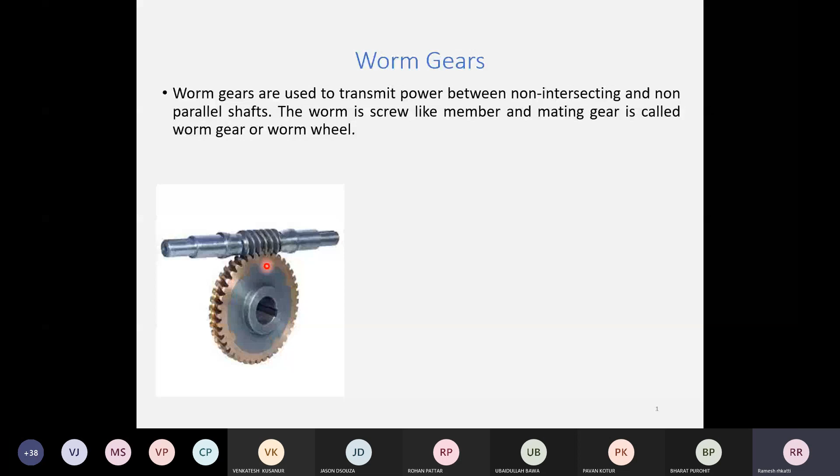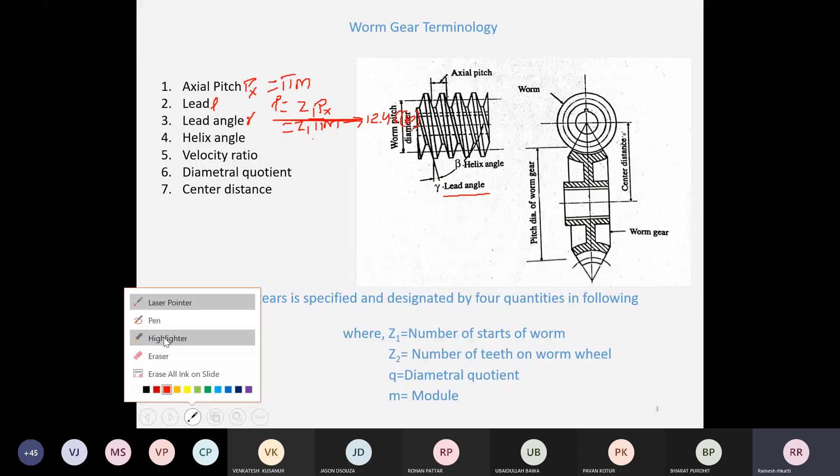How to calculate the lead angle? It is there in equation 12.46: tan gamma is equal to L, the lead, divided by pi d1. This equation is 12.46 E.

After that, the next is the helix angle, denoted by beta. Already you know about this helix angle. Here you can see that beta is the helix angle. Can anyone tell me what you mean by helix angle? See here, this is the axis of the worm. The helix angle is the angle between the tangent of the thread and the axis of the worm. From this, you are going to get the angle beta.

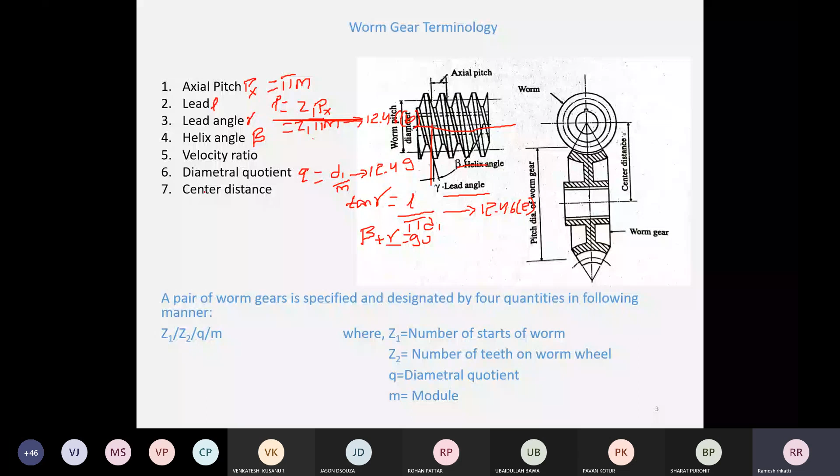Okay, and this center distance is denoted by A. It is the mean of D1 plus D2 divided by 2. Okay, and if in the problem center distance is given, you can calculate the pitch circle diameter, that is D1, and from that easily calculate the D2. Okay, these are the terminologies which we are going to use in the worm gear.

And while designing the worm gear, how the worm gear is going to be specified. Okay, a pair of worm gear is specified and designated by 4 quantities in the following manner. Z1 is nothing but number of starts of worm. Here you can see how many number of starts are there in the worm, and Z2 is number of teeth on the worm gear or worm wheel. From this you are going to get the Z1.

Z2 is number of teeth on the worm wheel, and Q is nothing but diametral quotient, which you are going to calculate from the ratio of pitch circle diameter to the module. From that you will get that Q value, and M is nothing but the module. These are the terminologies as well as how the pair of the worm gear is specified and designated.

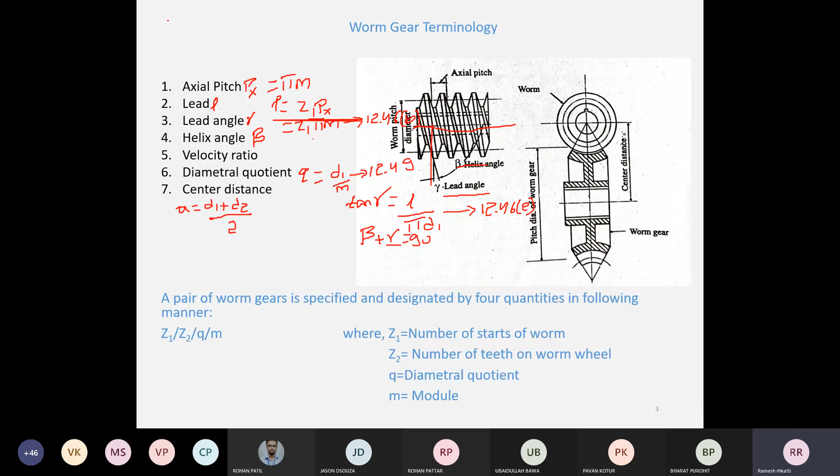In spur gear as well as helical gear, while designing, you have done the designing on the weaker member. Whereas in the worm gear, the teeth on the worm gear are always weaker than the worm. You can note down that. I will show you here: whatever the teeth on the worm wheel or worm gear are, these are weaker than those on the worm. That's why the designing is done on the weaker member.

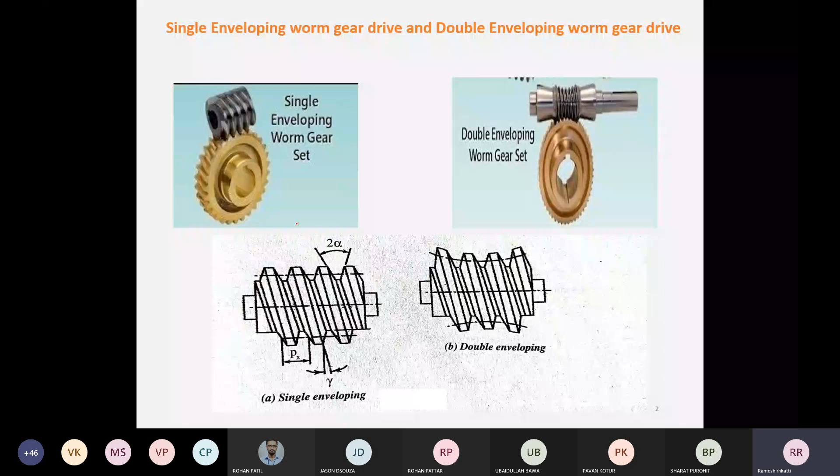Which is the weaker member? That is the worm wheel. Always in designing the worm gear, you should design according to the worm gear. First one is to calculate the strength factor. How are you going to calculate that? You can open equation 12.53a, that is strength of the worm gear teeth, the permissible tooth load according to the Lewis equation.

Whether you opened the equation? In today's class, I will not show the data handbook PDF, because some of you are not carrying the data handbook. If you don't open the data handbook, you will not understand. That's why purposely today I'm not showing it. All of you need to open the data handbook and check the equation.

Use the strength of the worm gear teeth, equation 12.53 for the permissible tooth load according to the Lewis equation. Can anyone tell me what is that? Therefore, Ft is equal to sigma d into Cv into b into y into P. Yes. Therefore, Ft is equal to sigma d Cv into b, the face width, into capital Y, which is pi into Lewis factor, into module. From this equation you can calculate that value. This is equation 12.53a.

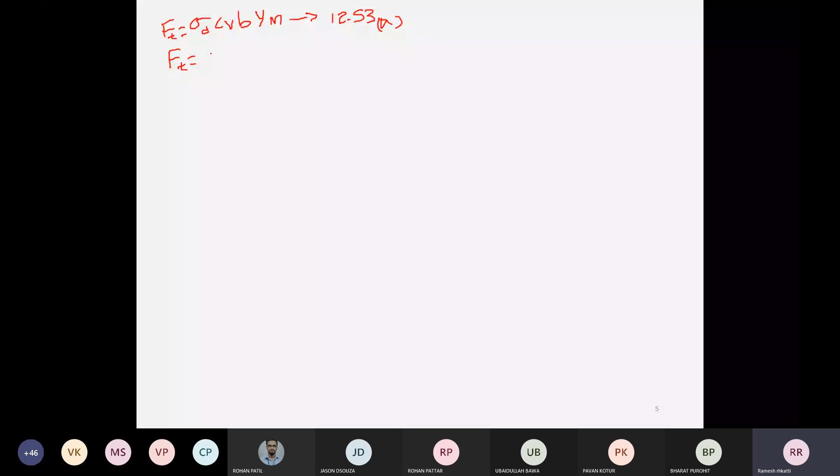Once you get the strength of the worm gear teeth, in this case you may not know the value of FT. Can anyone tell me how to calculate the FT value? FT is nothing but the permissible tangential load. How to calculate the permissible tangential load? It is 2 times MT divided by D2.

Okay, this equation is there in your data handbook. You can use that equation. Can anyone tell me where is that equation? 12.53D. Yes, 12.53D.

This is 12.53D equation. Okay, use this equation and calculate the FT, that is the permissible tangential load, which you can calculate using this equation. Okay, after finding the permissible tangential load, next is you need to find out the dynamic strength of the gear. It is given below that only. Correct? All of you getting that? Yes, sir. Yes, sir.

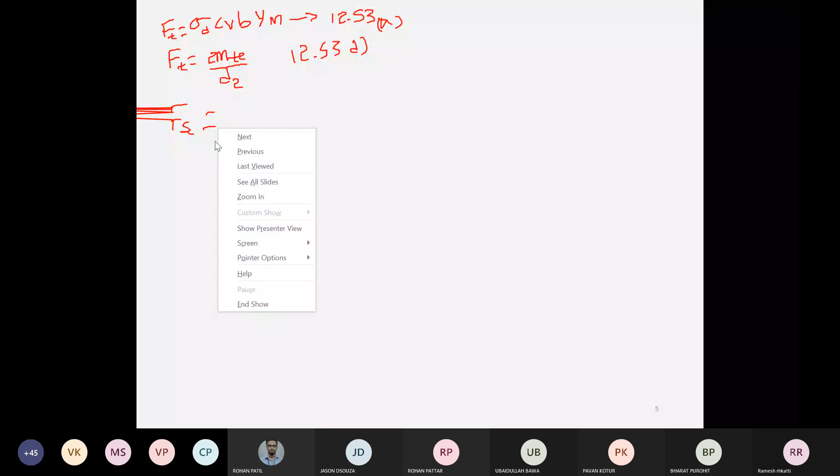Okay, after finding the dynamic strength of the gear, next you need to calculate the wear load. And that wear load formula is there in equation 12.62. That is page number 227. All of you open that page number 227. After finding Fs, after finding that value, note down the wear load formula. For wear load, Fw is equal to D2BK. Okay, this is equation 12.62a. It has to be D2.

D2B into K, where K, you can see that below that only they have given how to calculate the K. K is the load stress factor from table 12.30. From that table 12.30 you can calculate that. While solving the problem I'll tell you how to note down that K value. Already I think this you have not done. Okay, you will be doing it now.

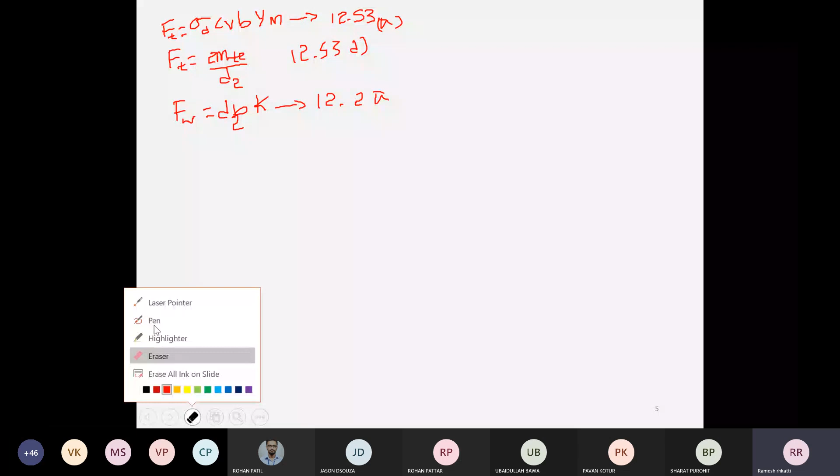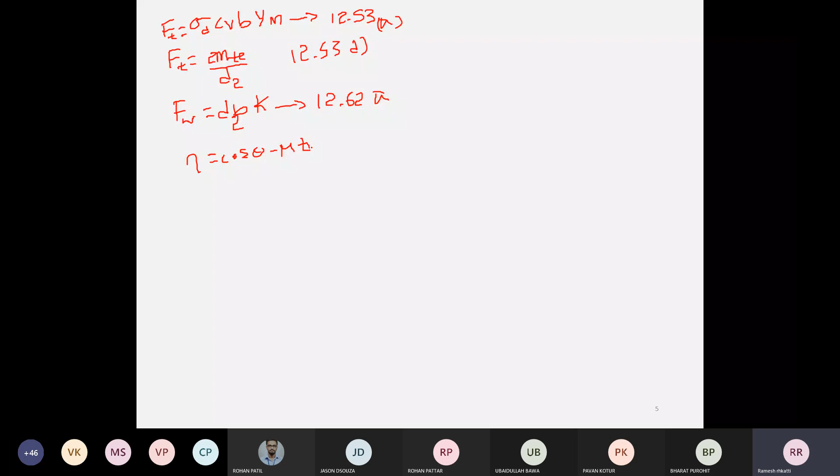After that, next is you need to calculate the efficiency of the worm. Okay, how to calculate the efficiency of the worm gear, which you are going to get in equation 12.57b. That is the previous page, page number 225. You can see that equation 12.57b is there. You have to use the equation efficiency is equal to cos theta minus mu tan gamma divided by cos theta plus mu cot gamma.

Okay, this is equation 12.57b. You have to use this equation when the worm drives the worm wheel. And you have to use equation 12.57c when the worm gear drives the worm. Almost the equation is same, only the difference is in place of tan gamma it is cot gamma, and in place of cot gamma it is tan gamma. Just I will write 12.57c here. Okay, this is to find out the efficiency of the worm.

And after that, as both the gears mesh, a lot of heat will be generated. You need to calculate the heat generated and heat dissipated, by using equation 12.63a. It is nothing but the amount of heat generated. Amount of heat generated is Q. Q is equal to mu into Fn into Vr divided by cos gamma. This is equation 12.63a. While solving the problem, I will tell you how to calculate this Fn. Fn is nothing but the force normal to the tooth surface, and its unit is Newton. How to calculate that and how to take down the mu also I will tell you.

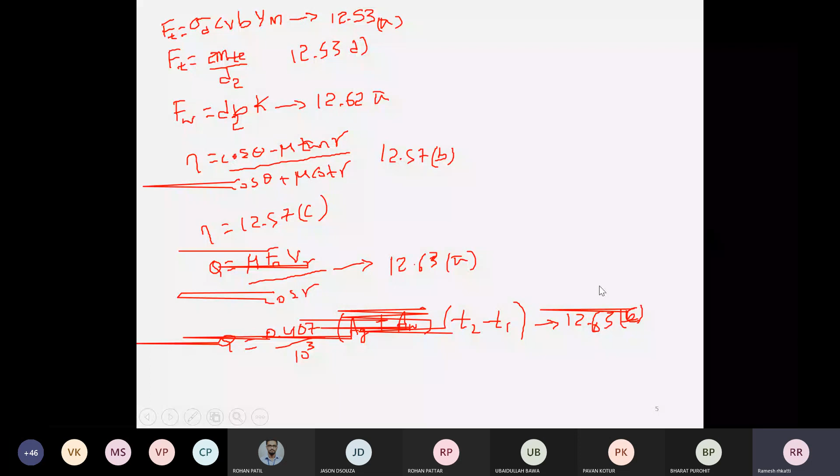If you have any doubts in this, you can ask me. Do you have any doubts in this? Any one of you speak? You don't have any doubts? Everything is clear? Yes, sir. Yes, sir.